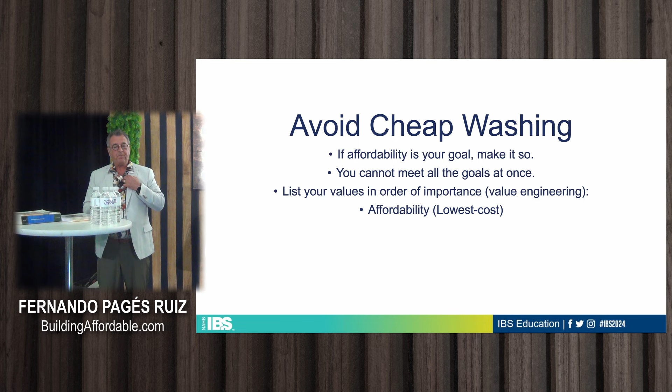My first goal is affordability. I aim for the lowest cost. I design for the lowest cost. I do not stop working on a set of plans until I know that there is nothing I can do, there isn't a nail I can extract from this to make the cost lower.

That's my first step. My second step is I've got to make it pretty, right? Because human beings are complicated animals. We're not like chickens, we don't just need a dry stick and a warm place to stay away from the fox at night. We have all kinds of emotional needs and stuff. We needed to have curb appeal, we needed to impress our friends and all. So you have to make it pretty enough, it has to be somewhat appealing.

So once I get all the way down to where I've whittled out the last cent, I go back and start trying to see now, what can I do? How can I put lipstick on this pig? So I try to make it marketable. That's my second, not my first, that's my second criteria. And my third criteria is durability.

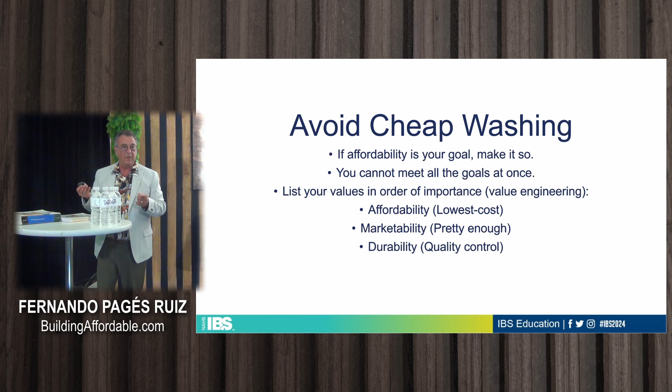Durability, quality control. When you're building very affordably, you're doing a lot of things which I call material sparing techniques, where you're using less concrete, less wood, less of everything, or thinner drywall. It really is cheapening out in a sense. But when you do that, and you can by code, I'll verify this in a minute, you have to be very careful. You have to do a very good job as a builder. You've got to have your eyes on the job. Quality control becomes very important. Why is durability important? I think the cheapest way to do something durable is to use good craft, to build it well, to use good quality control.

It's got to be durable because the warranty calls can eat your lunch. So I don't build durable because I believe in durability and I want homes that will last for centuries, or I believe my buyers deserve a house they can pass on to the next generation. I do it so my phone won't ring, right? I do not want warranty calls. It's part of my affordability scheme.

So every year I create a budget in January that has all the line items that I normally use in construction, from concrete all the way up to paint. And then it's got no dollars in that budget, it's only a place to deposit costs. When I get a warranty call, everything related to the cause of that warranty call goes under that line item.

So one year I got a call, and I got the call several times that year, that there were window leaks. And the window leaks caused damage to the drywall, they caused damage to the flooring, they caused damage to the trim. I had to do all this work. All of those costs, the flooring costs didn't go under flooring, they went under windows. The drywall costs went under windows. Everything related to the window problem went under windows.

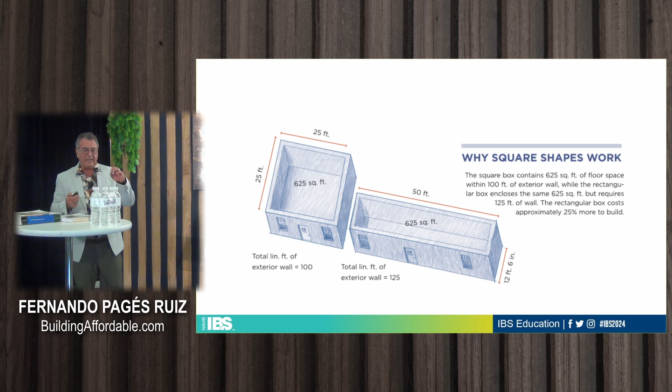That's 25% more, right? 25% more of what? Insulation, foam, continuous insulation, siding, sheathing, all kinds of stuff that make exterior walls more expensive than interior walls. So you see, the very first lines you drew on paper, one is 25% more expensive to build, at least in this one parameter.

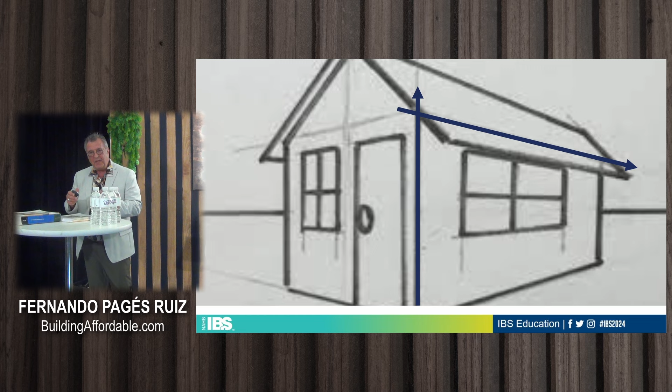Now, it doesn't flow through perfectly when you actually get to doing a house, because in the house you have another consideration, which is you actually have the rectangles and squares that are the exterior walls. So after I get my footprint, this is my basic footprint, I start playing with what is the ratio between my square feet of floor and my square feet of exterior wall. Not just the perimeter, but how many square feet of floor and square feet of exterior wall.

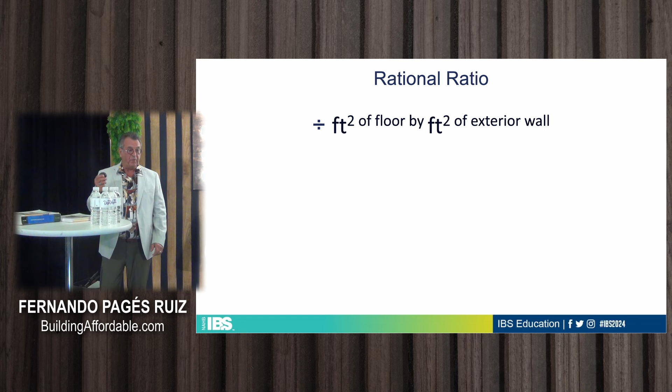If we run the same equations that I showed you with the perimeter, you discover that in the example, the 625 square foot square yields a ratio of 0.78. That means I divide the square feet of floor by the square feet of wall, and I get 0.78. That means that for every square foot of interior floor space, I am occupying a little bit less than a square foot of exterior wall, right?

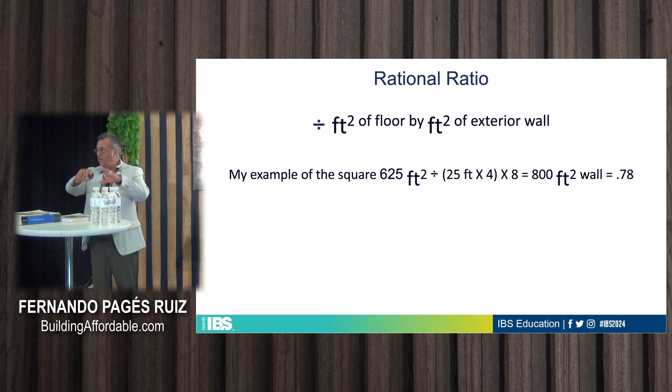0.78 exterior wall to 1 square foot of interior floor space. That's pretty efficient. What is the most efficient shape? Somebody said a circle, but when you speak about volume, it's a sphere. That's why people were building geodesic domes for a while. But they're impossible to furnish, they look really weird, and they're difficult and not cheap to build. So these mathematical formulas have a limit.

In this case, 0.78 is pretty good. You're trying to get to 1, as close as you can. The rectangle is a little less efficient, it's 0.62.

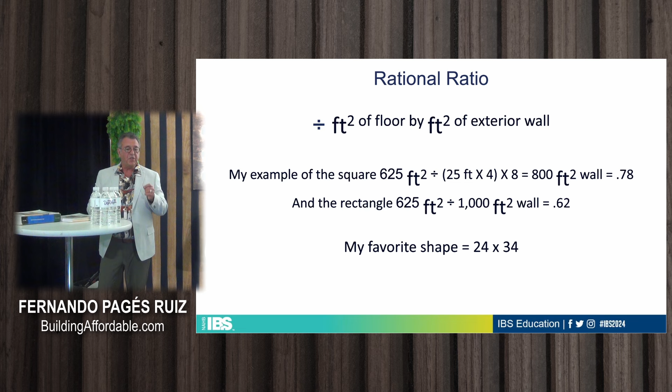But I discovered messing around, because I created an Excel formula where I could put the linear feet of wall and everything in it and calculate stuff out based on the height—10-foot wall, 8-foot wall, whatever it is—that one of the reasons this plan I've been working with was really affordable to build is it was very efficient with this ratio. It was 24 by 34.

See, I had a lot of narrow lots. You put this on a 35-foot lot, it's 24 feet wide. And this shape yielded the incredible ratio of 0.88. So you can play with this, see how close you can get to 1. It's kind of fun.

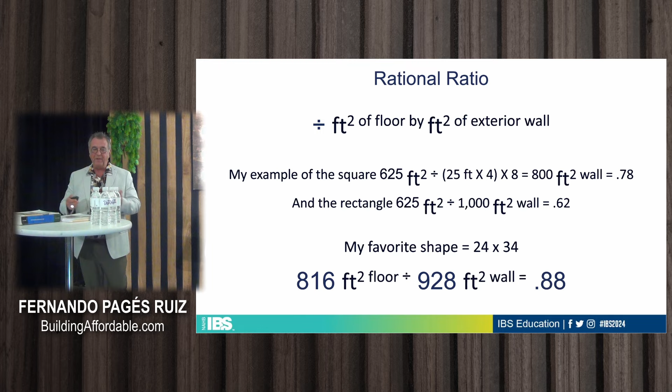After I've established what my shell is, my basic shape—and by the way, if you stray from the rectangle and the squares and these basic shapes, you inevitably cost yourself a lot of money. You start putting corners on the house and doing C-shaped and L-shaped designs, more money. Every corner is an expensive proposition.

So try and keep your basic shape simple, and if you need to attach a garage to it, make it a square and make it something that's almost modular that you can put on different sides of the house, move it around. But the next thing we got to do after we're out of the drawing board, we start thinking about the interior of the house, is locate your central utility core.

This is where all your heavy-duty utilities are going to be—your HVAC system, your plumbing, your water heaters, possibly your panel. So I look to put it in the center of the home. I like to put it in the center, and I actually run all my HVAC from that center of the house in a trunk line.

I don't run ducts all over the place. I try not to run pipes all over the place. I try not to run heavy wiring for things like dishwashers and stoves all over the place. I try to keep it in a very small and concentrated area.

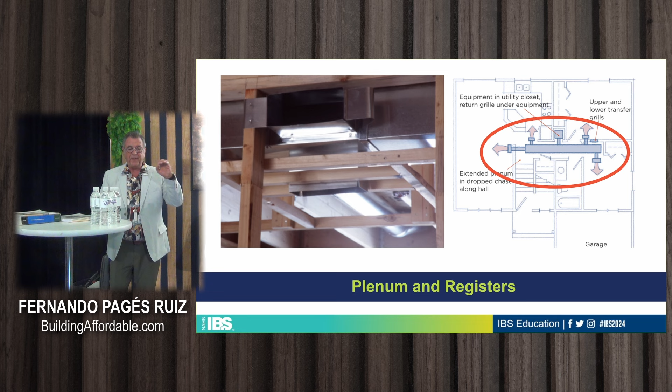Have you ever been to a cool restaurant? I can tell, like me, you like restaurants. How are they air conditioned and heated? There's a giant, cool-looking duct painted some neat color in the middle, and the air conditioning just spills out the sides of the ducts.

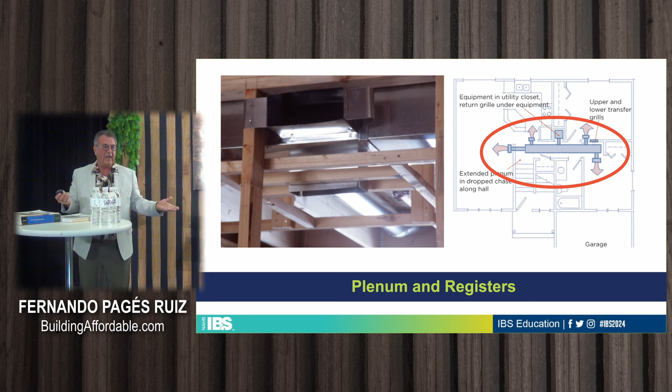That's how I heat and air condition my house. If you've got a good exterior envelope, well-sealed, nice insulation, you don't need to run ducting all over the place to get it in every exterior wall. You can do it on an interior wall.

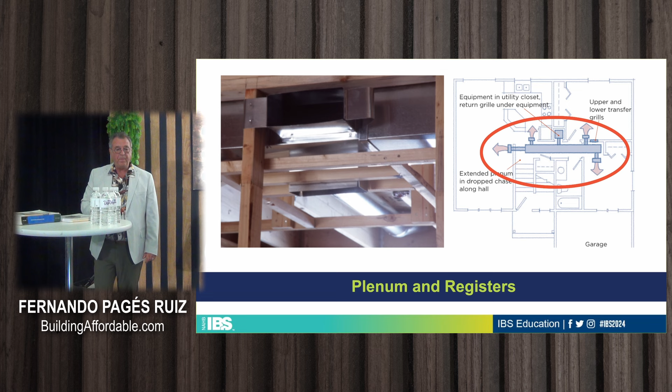And that's my register boot right there on the left-hand side. There's one of my guys building a little drop ceiling below the trunk line or plenum. We're on the lower level. He's just doing drywall over that. It's hidden, and that's it. That's my whole AC system.

The next thing that concerns me is the plumbing. I used to say back-to-back plumbing. Everybody knows that, right? How many people in the room have heard of back-to-back? We're just talking about putting your toilets back-to-back. You see this little example, they are back-to-back.

That'll save you $50. Okay? It is not the be-all and end-all of arranging your plumbing. The main thing you want with your plumbing is to be in the smallest area of the house as possible.

There's a brilliant guy called Gary Klein who came up with what he calls the wet room rectangle. He did this because he was concerned about the wait time for hot water. You wait too long for hot water, you waste water, and he didn't want anybody to waste water. So he began to see that if you put the water heater and the fixtures all very close together, you turn on the faucet and the water comes out quickly.

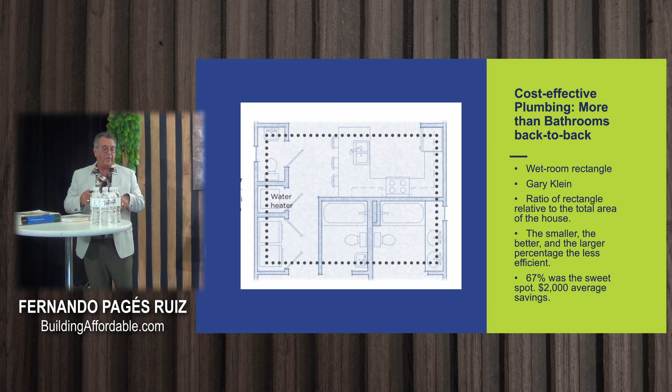So he devised this wet room rectangle idea. The basic idea is that you draw a rectangle in your plans that encloses all the wet areas, wherever there's plumbing, including the water heater, and then compare it to the rest of your plan. This is a very efficient little footprint. In fact, the guy who drew this footprint, architect Andres Guano, is here in the room somewhere, working on affordable housing. He came up with this very tight, very nice little arrangement.

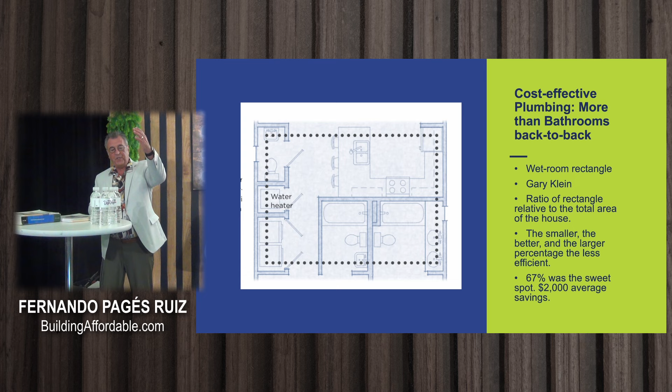If you see the wet room rectangle and how much space it occupies in the total house, he figured out that if you were under 67%, meaning your total wet room area was 67% or less of the total area of the home, you had something pretty efficient. In California, he said you could save $2,000 just by doing this.

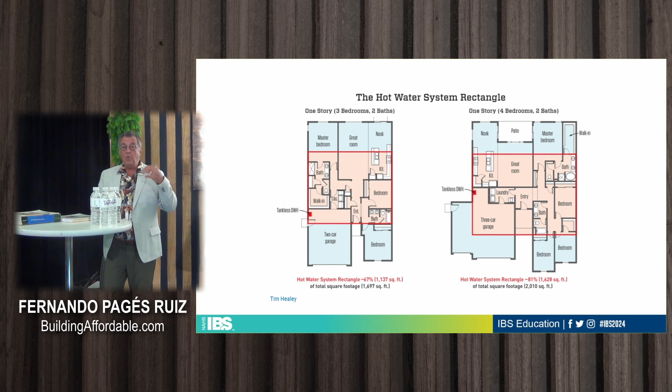I don't know about that figure. California's kind of an expensive place. Maybe you can save $2,000 with back-to-back plumbing in California, I don't know. But he figured that this was very efficient, and you could get down lower, or go much higher. He found some builders' plans were 155% of the building.

How do you get that much? Well, in California, you put the water heaters out in the garage, right? So a lot of times the water heater was way out in the third stall of this three-car garage, and it became a really big rectangle.

So you want to get all of that area as concentrated as you can. That's the main thing, more than the back-to-back bathrooms, because we're spoiled, right? We've got all these really easy fixtures, PEX piping, you can run things all over the place.

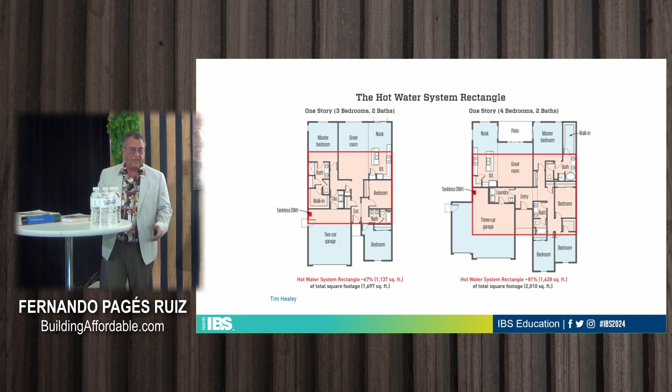Lastly, you have to collaborate with your subs. But who are the most important subs? Who are the first guys you call when you want to design, plan, and go? You've heard this in lectures before. Who do you call? Who do you call? It's the first one you call.

The architect. Several people said that, but I didn't want the right answer, so you're not getting one. Who said framer? Very good. Do you use my website? No, him. You got the right answer. I didn't want that, I wanted his answer, the wrong answer. You use my site? Good, very good. My beautiful assistant will hand you a book.

So the thing is, everybody calls in the framer and the lumberyard first. We got to talk to them first. But the framer don't know shit.

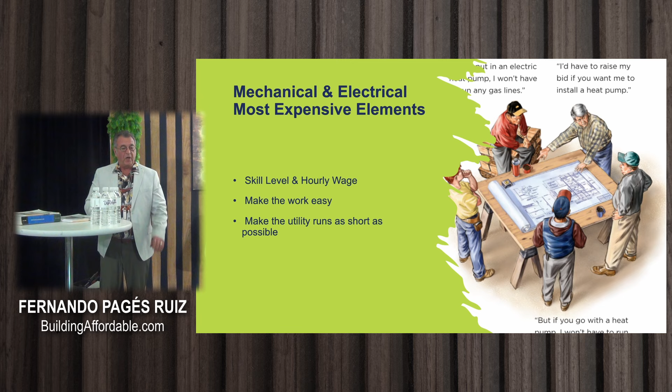The land strategies, very quickly now. Right now we are in a tremendous effervescence of rezoning, with states doing what they call preemptive action—they take over local zoning so they can change it when local authorities refuse to. Right now there's currently like 20-odd bills going through different state houses to do things like allow additional dwelling units, accessory dwelling units, granny flats, reduce the size of lots to a very minimum, and eliminate single-family zoning entirely.

So if you want to do a small apartment building on a single-family lot, you can. It allows multiple single families on a single-family lot, so if you want to do 6 homes on this lot, you can. This is going on in state after state, city after city. Houston, where I am, just passed a ruling about 6 homes on a single lot. You can put a commercial ADU on the front of your property and have a store there. All over the place, things are happening.

You're shaking your head, is that disbelief for you? What, shocked, shocked? No, good. Here, you use my own site?

Anyhow, there's a lot of things you can do, I'll give you a couple of examples. This is in Atlanta—they got new rules in Atlanta, and now you can do this. This is a fellow by the name of Eric Kronberg, an architect and developer in Atlanta. He bought a handful of lots and kind of reconfigured them into odd shapes, as you can see.

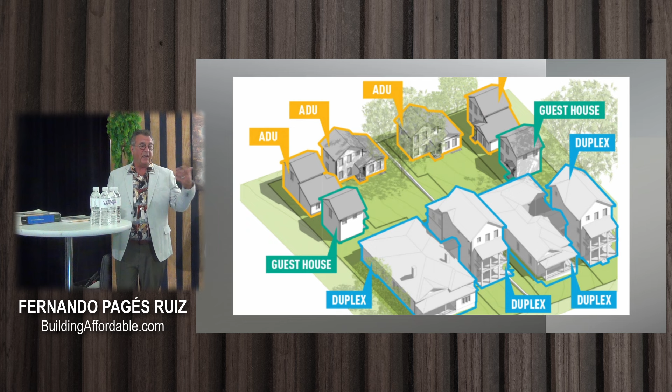This is a rental project for him, he owns and rents these units. He's got a duplex, a guest house, and an ADU over a garage—so he's got 4 units on a single-family lot. Now you could have a single-family house and an ADU, or a single-family house and a guest house and an ADU. You could do different combinations.

In my neck of the woods, you could do 6 if you have room. A lot of places have eliminated parking requirements, like in Atlanta, so you'll notice he doesn't have a lot of parking—he doesn't waste space on parking. I think he's near transit, so that's part of his equation.

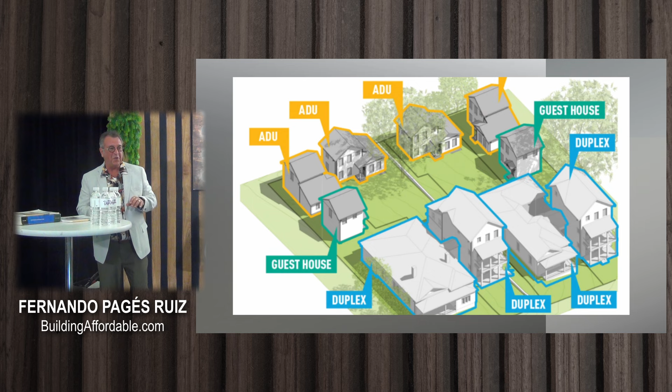They're quite pretty, this is very successful. It's complete, and that's kind of the courtyard effect—instead of having backyards for every house, he has a shared backyard that all the homes use together. This is another thing that's pretty common now, shared amenities like backyards. It's a very nice project, quite doable.

But if you run your homes perpendicular to the main road, and you calculate how much concrete you spent in that alley for 8 homes, 4 on each side, versus running 8 25-foot driveways—the minimum front yard setback—with their own curb cuts and everything else, it was like a ton of money different.

I meant to look up that figure, because it's actually in my book, but I forgot. I apologize, so I don't have a number for you, but please take my word: it was a lot less expensive to build this alley than it would have been to build 8 individual driveways. So there's some efficiency here.

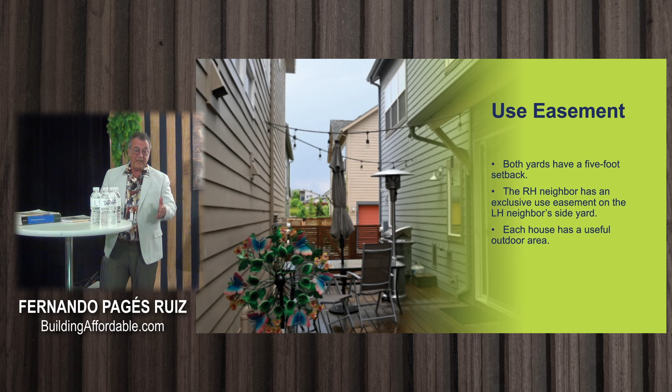Sold out. So I've got a challenge for you.